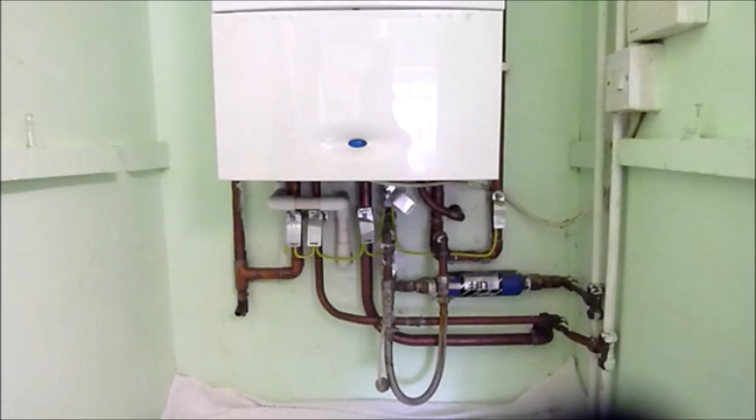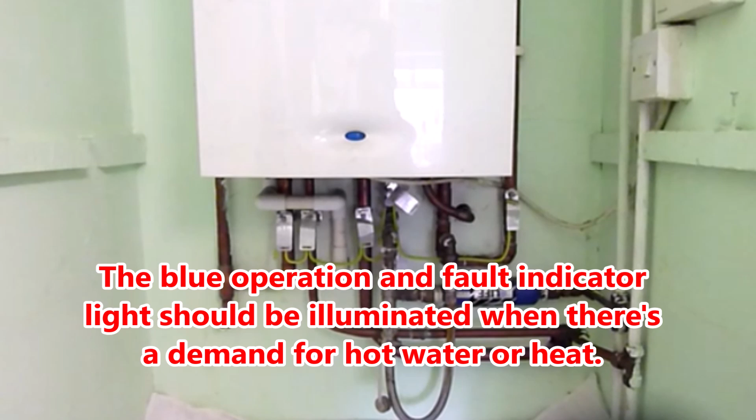This boiler is around 8 years old and it's the 25SI compact model. The boiler does not heat the water or central heating in the house, and we found it leaking as well. Also, the blue operation and fault indicator light should be illuminated when there's a demand for hot water or heat, but this does not light up anymore.

So before you attempt to do anything, ensure you turn the boiler off at the switch and turn off the water supply before you investigate your boiler.

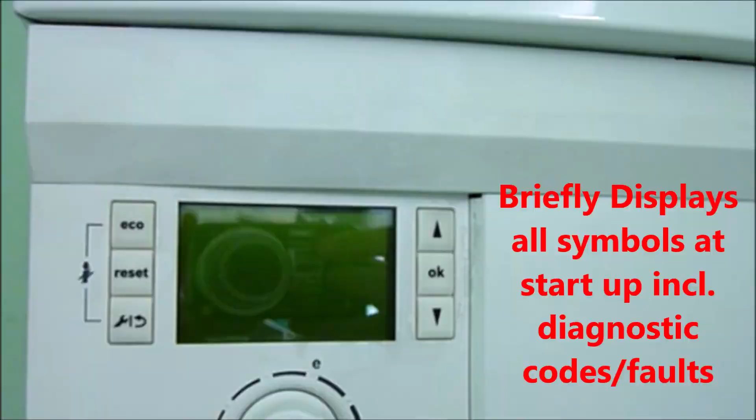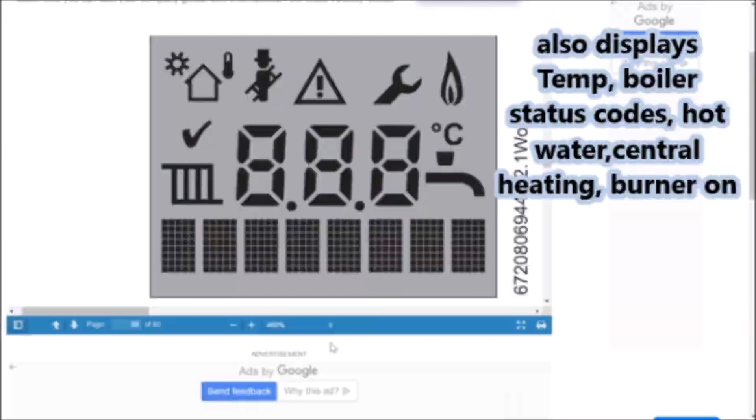At the front of this boiler there is a flap that you need to pull down, and on the right is the display which briefly shows all the symbols at startup, including diagnostic codes. Any faults are displayed there, so if you've got any errors it will show on that display screen. Also displayed is the temperature, boiler status codes, hot water, and central heating. So if you have an error code, refer to your manual.

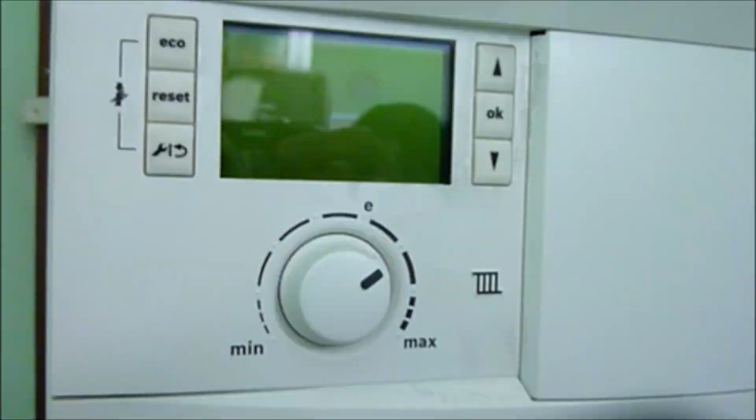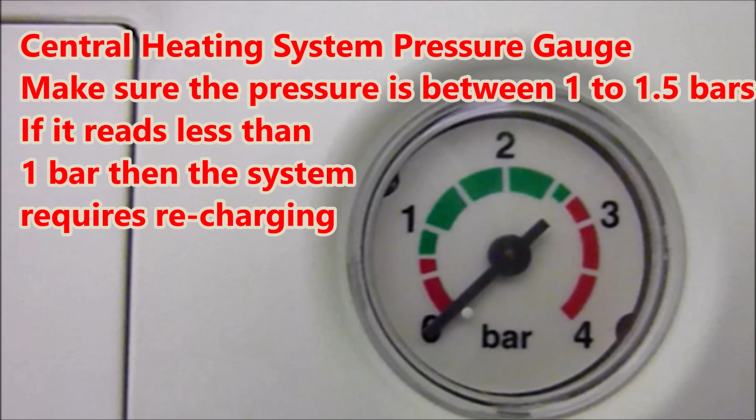But for the purpose of this video, I'm just going to go through the process of repressurizing the boiler. The central heating system pressure gauge is on the right of the boiler, and you want to make sure the pressure is between 1 to 1.5 bars. If it reads less than 1 bar, then the system requires recharging.

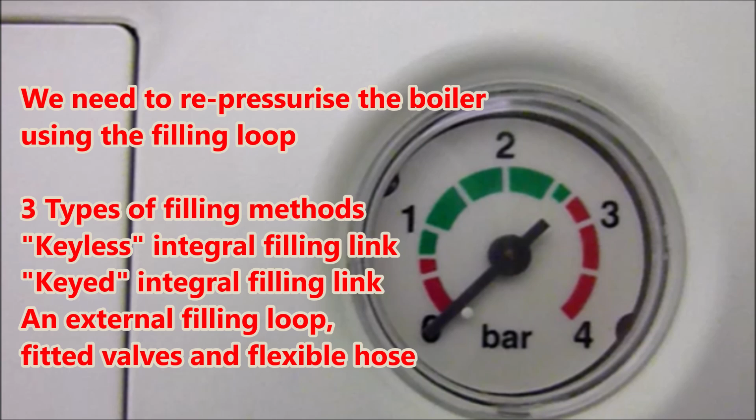We need to repressurize the boiler using the filling loop. There are 3 types of filling methods: keyless integral filling link, keyed filling link, and an external filling loop with fitted valves and a flexible hose.

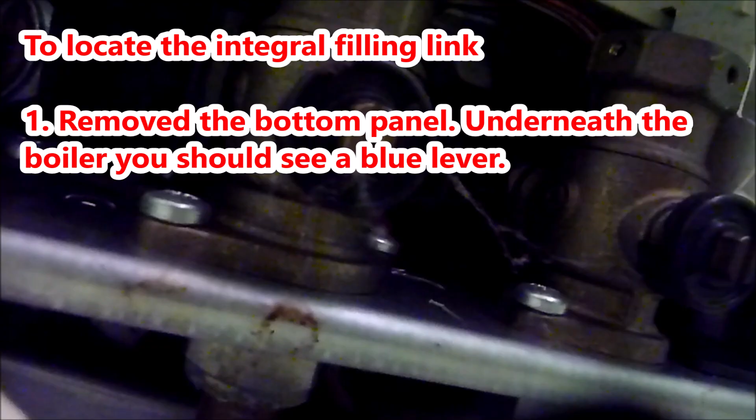So I will start with explaining how to repressurize the boiler using the optional integral keyless filling link. To locate the filling link, remove the bottom panel. Underneath the boiler, you should see a blue lever. Pull the blue lever down and monitor the pressure gauge on the boiler. When the needle reaches between 1 to 1.5 bar, release the blue lever.

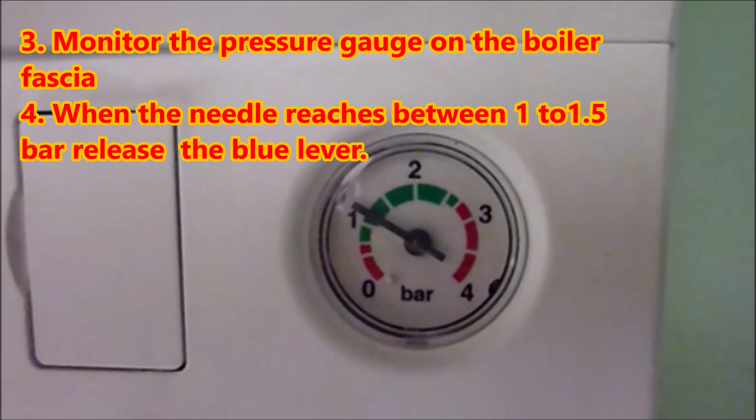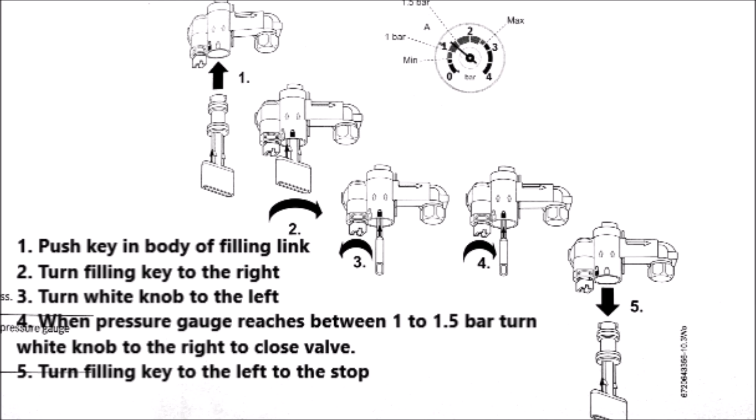Next is the optional integral keyed filling link. Use the integral keyed filling link for this. Push the key into the body of the filling link, ensuring the arrow on the key shaft lines up with the open padlock symbol. Turn the filling key to the right and then turn the white knob to the left. When the pressure gauge reaches between 1 to 1.5 bar, turn the white knob to the right to close the valve, and then turn the filling key to the left.

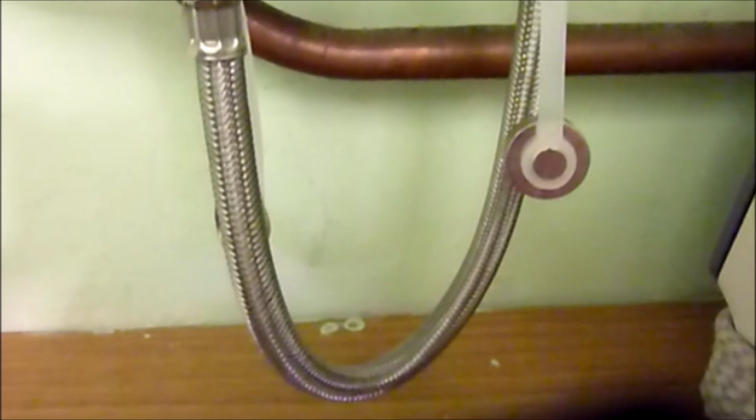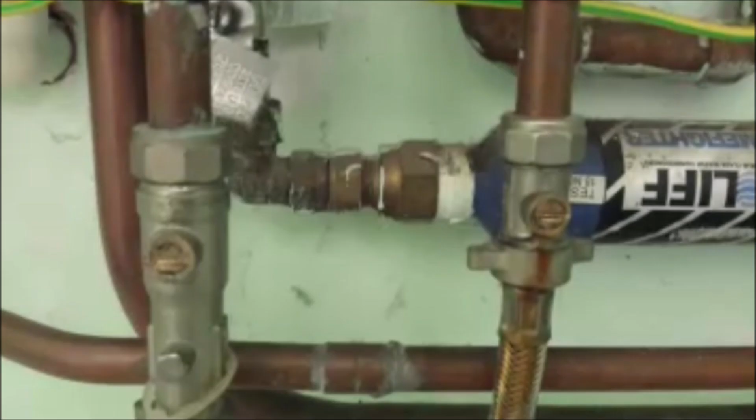Unscrew the blanking cap, attach the hose to the valves, and screw it on hand tight, so don't overscrew it. Turn the handle, or if you haven't got a handle, which we don't have, we usually use a screwdriver. So either use the handle or screwdriver slot, and turn it 90 degrees to open the valves to allow the cold water mains to run through the system.

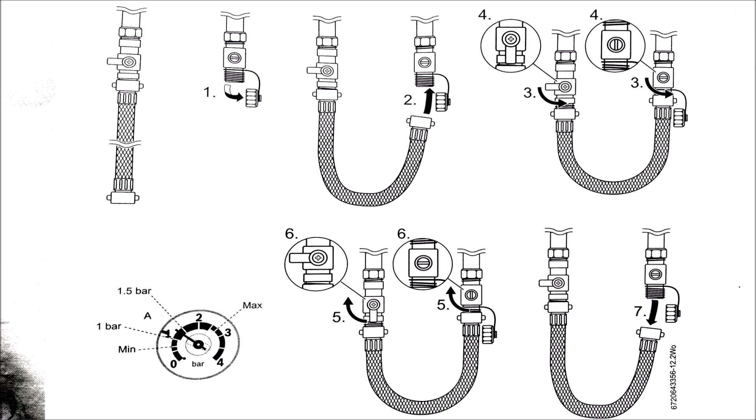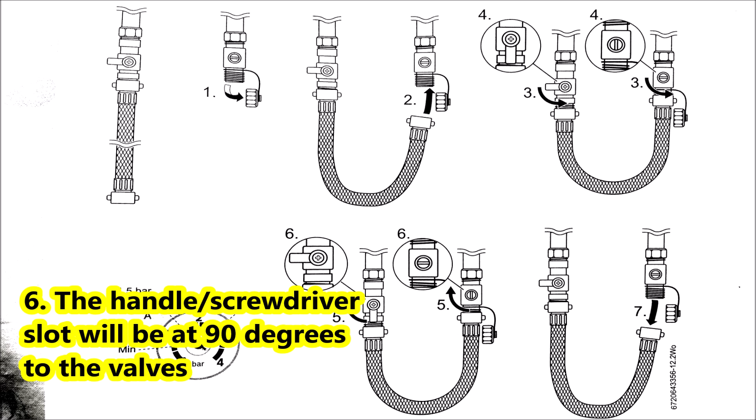Using a screwdriver or handle, the slot will be in line with the valves. When the pressure gauge reaches between 1 and 1.5 bar, turn the handle slot back through 90 degrees to close the valve, so using the screwdriver or handle, the slot will be at 90 degrees to the valves. Remove the hose and replace the blanking caps.

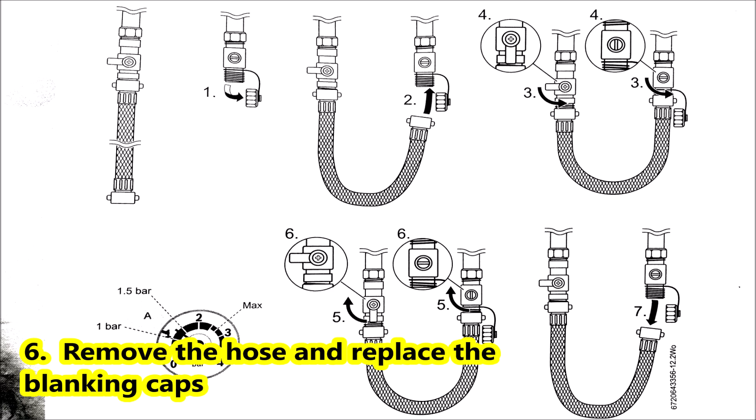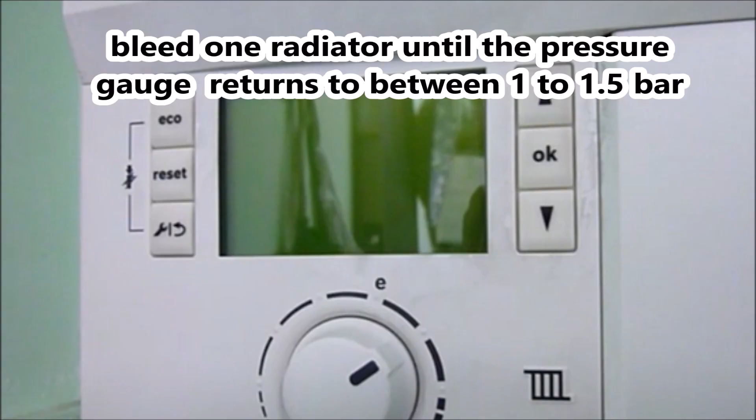If the pressure gauge reads more than 1.5 bar as a result of overfilling, then bleed one radiator until the pressure gauge returns to between 1 to 1.5 bar.

Unfortunately, the screws have worn down and are damaged as well, preventing us from repressurizing the boiler. Had to call an engineer out.

The engineer replaced the screws and also fitted these black handles, making it much easier when it comes to repressurizing the boiler. The boiler is switched on, and the display is showing a temperature of 36 Celsius, and the pressure gauge is back to where it should be, between 1 to 1.5 bars.

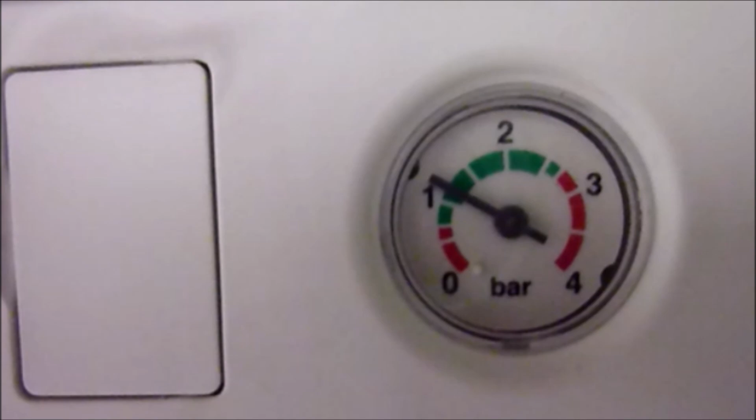The blue indicator light comes on when hot water is in demand, and the central heating is back on as well. The display is showing the hot water and central heating symbols. As you can see there, all working fine.

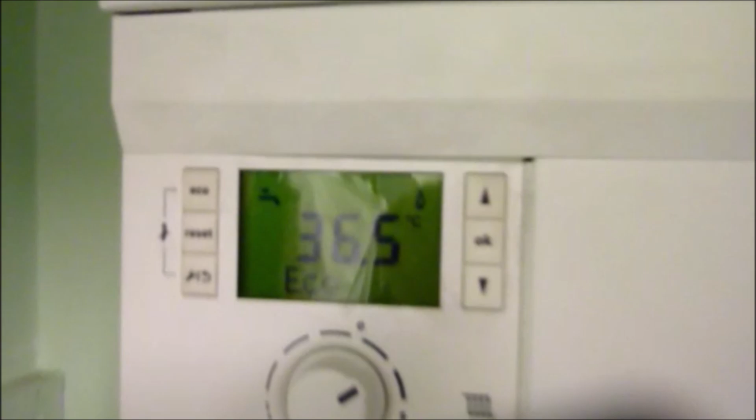So yeah, ideally you should get your boiler serviced every year to maintain it, and this should also warrant it as well. Okay, that's it for this video.